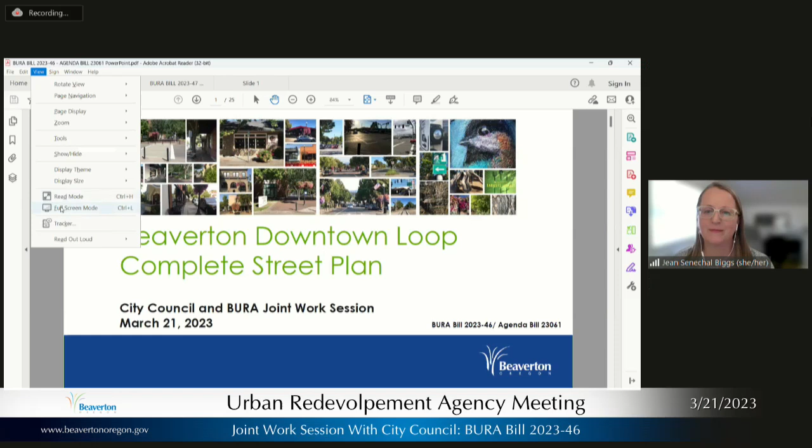Terrific, okay thank you. So the Downtown Loop Complete Street Plan - this project is a partnership between the city and BURA. BURA funded the planning phase and we're close to completing this work. The project team is in our final round of community engagement to gather comments on the project's preferred alternative, which is the conceptual design that the team developed based on stakeholder input from early 2022. With the concept plan for the proposed changes in place, it sets the stage for our next steps.

So what is the loop? The loop is a bold and transformative vision to link Old Town and Beaverton Central with transportation investments on Hall Boulevard, Watson Avenue, and 5th Street that support a vibrant and inclusive downtown. We're reimagining our streets and sidewalks to create an exciting pedestrian experience, something we heard consistently from BURA board members and the council when we've spoken to you in the past.

So as I go through the presentation, please keep these questions in mind to guide your discussion tonight, and I'll share these again at the end of the presentation.

Great, so we're on a path to adopting the Loop Plan. March and April are busy with engagement activities to inform the community and gather feedback. We're here tonight with this joint work session. We'll come back to BURA next month on April 25th for a brief presentation with our draft report and to share updates on our community outreach. Then in May, Council will consider adopting the plan through council action. As I said earlier, completing this planning phase with a high-level concept for the proposed changes sets the stage for our next steps.

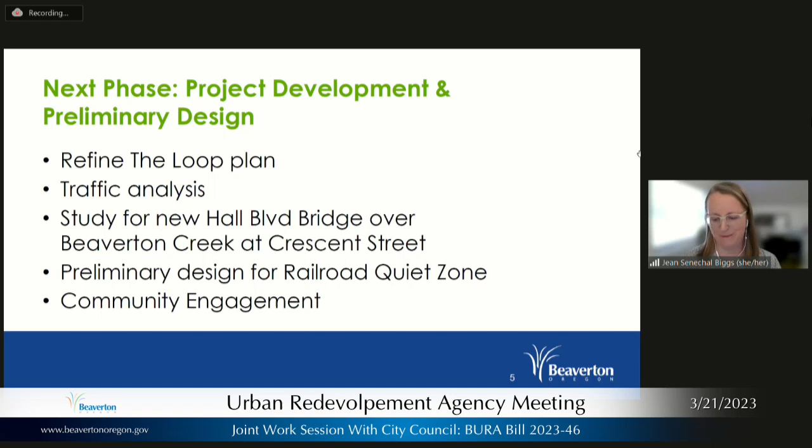And there's still lots of decisions to come in the next phase to refine the plan. We'll come back to you as those details are worked out. So let's start here.

The preferred alternative is based on our guiding principle of designing streets for people. It's about putting pedestrians first with sidewalks that are spacious and gracious, safe and universally accessible. It's about separating people biking from motor vehicles with continuous protected bike lanes. It's about improving the experience for people riding transit with better bus stops. It's about creating placemaking opportunities. And for people who come downtown by car for shopping, dining, and services, the loop creates a great experience outdoors and on foot to support what we call the park once and walk model.

In winter 2022, just over a year ago, we reached out to the community and BURA with design alternatives and asked for feedback. Hundreds of community members, visitors, and stakeholders have weighed in on the design options presented for the Beaverton Downtown Loop. Some, like the 22 people on our Community Advisory Committee, dedicated significant time to study the conditions, learn about technical constraints, and weigh the balance of needs for the diversity of people requiring access to downtown sidewalks and transportation. Others heard short presentations of the options and engaged in brief conversations with project staff. Through an online survey tool, 321 individuals advocated for their interests and provided insights on how the design options may be received in the community at large.

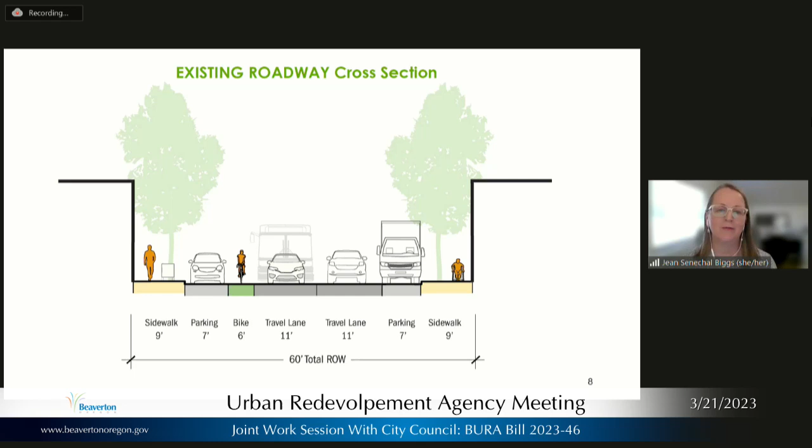To make space for wider sidewalks and protected bike lanes, the preferred alternative includes several key changes to the streetscape, including removing on-street parking on one side or both sides, planting new street trees and replacing our canopy as we create new wider accessible sidewalk spaces, consolidating driveways to reduce conflicts between people biking, walking, and driving cars, adding traffic signals to provide better clarity between travel modes, slowing traffic to reach our target speeds of 20 miles an hour, and in some places, acquiring property for additional right-of-way. Sometimes it's slivers at the back of the sidewalk, sometimes it's 3 feet along an entire frontage so we have space to build those wider sidewalks.

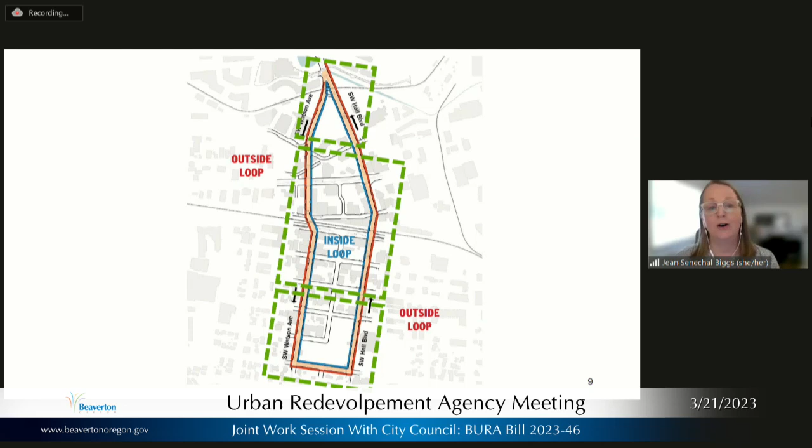So the preferred alternative is defined by these 3 segments that you see highlighted in the green boxes, and all 3 create great pedestrian experiences throughout the loop. Let's walk through them. Let's go to the next slide.

This middle section we call the promenade extends from Millikan Way to 2nd Street. Next slide.

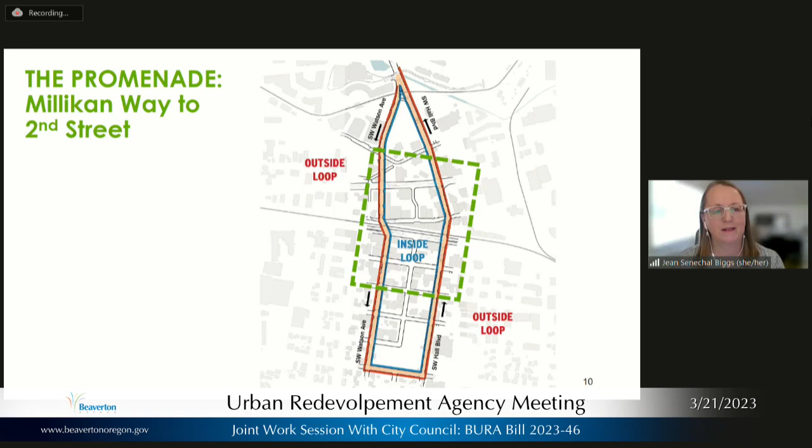Here you'll see 12-foot sidewalks on one side of the street and 18-foot wide sidewalks on the other, an 8-foot wide raised bike lane—we call it cycle track—and then 2 11-foot travel lanes. Next slide.

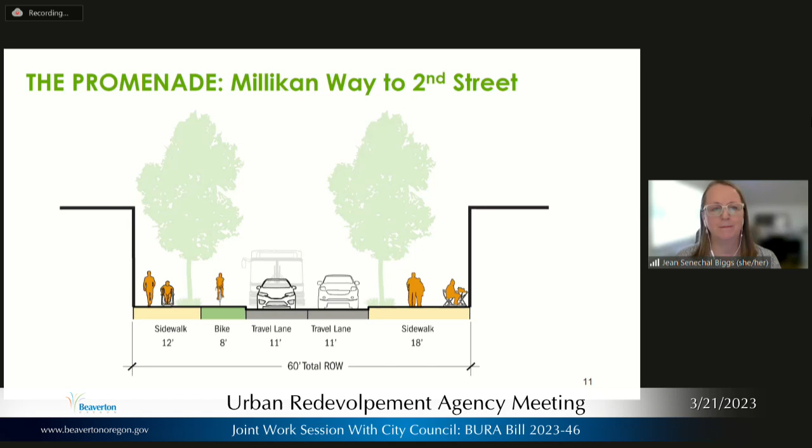So what does that look like at the street level and how would we use that space? With these 18-foot wide sidewalks, you can see we can create lively places to gather, meet friends, enjoy downtown. We can support business activity with space for A-board signs, store displays, and cafe tables, and we can ensure an accessible route by maintaining a clear pedestrian through zone. Next slide.

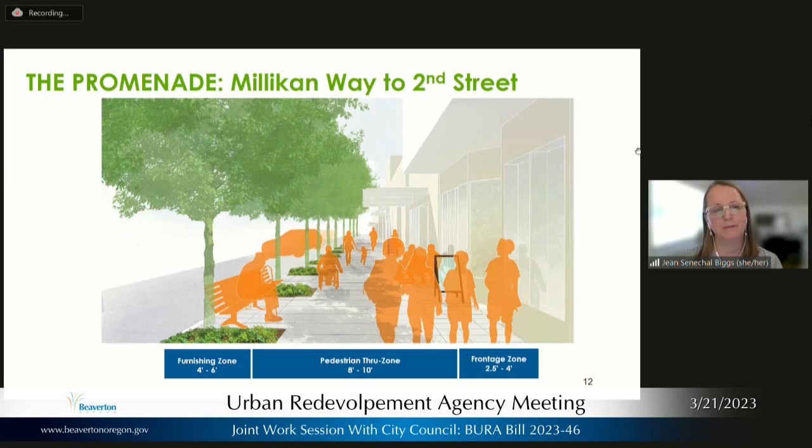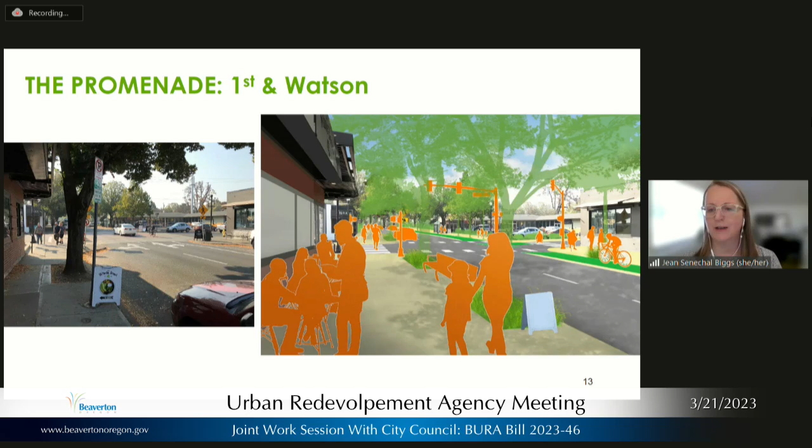One of the things we heard from our CAC, our Community Advisory Committee, is that there is no loop without addressing the crossings at Canyon and at Farmington. So how do we make crossing our 2 major urban streets a more comfortable and safer experience?

We do this, as you'll see in the picture on the right, by installing high visibility crosswalks with ladder bar markings and green cross bike markings through the intersection, which make people walking and biking more visible. We improve safety by timing the traffic signals with leading pedestrian intervals—this is when the walk sign goes on before the green light for cars, so pedestrians have a head start crossing the street and are more visible to people driving through the intersection. We also improve safety by removing the third travel lane approaching those intersections, so there's only one lane of vehicles turning left or right into the crosswalks in these locations, but it also creates space for the bike lane that just doesn't exist today.

Okay, let's go to the next slide.

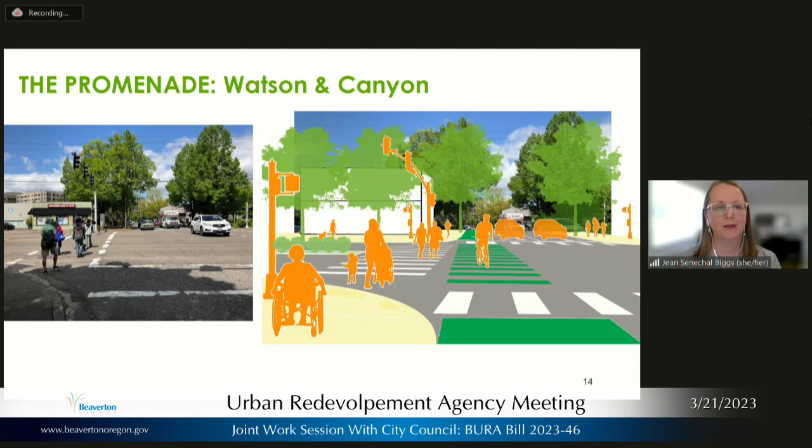So here at Hall and Canyon, the plan proposes using pavement markings that highlight the space for people walking and biking, giving priority to pedestrians with a head start when they cross, and removing that third travel lane to create space for bikes that doesn't exist today. Also, removing the right turn slip lane on the southeast corner of the intersection, so that cars turning from Hall onto Canyon have to make that turn much slower than they do today.

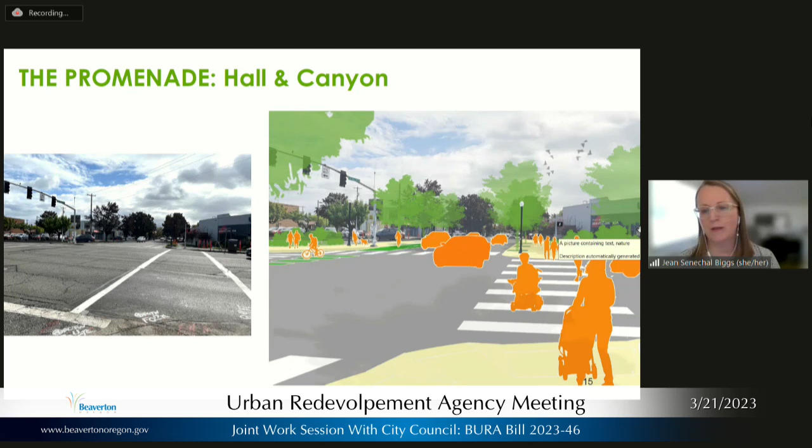Next slide. So we're going to move to the Old Town portion. Let's go to the next slide.

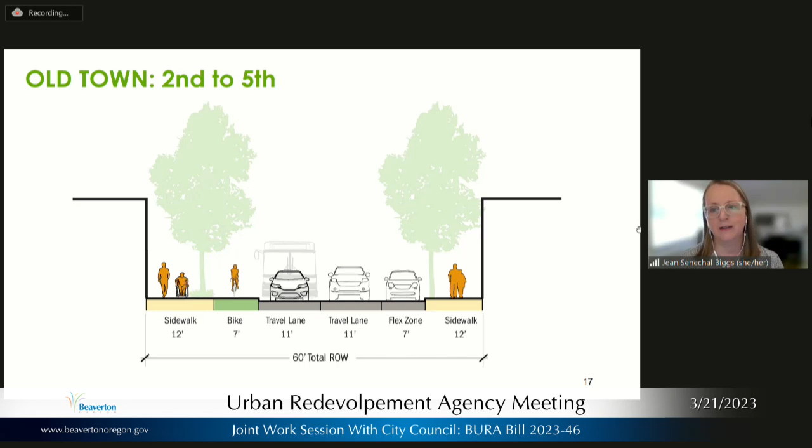So here's our cross section. Different here from the promenade is that you'll see the parking return on one side of the street. We have 12-foot sidewalks on both sides, a 7-foot cycle track, two 11-foot travel lanes, and a 7-foot flex zone. I'll explain what that means in a minute.

Next slide. So now here's an image of the 12-foot sidewalk adjacent to the 7-foot cycle track. You'll see here how the sidewalk space for people walking is separated from the cycle track by the furnishing zone with its street trees and other site furnishings. Visual and tactile cues help separate the space between these modes.

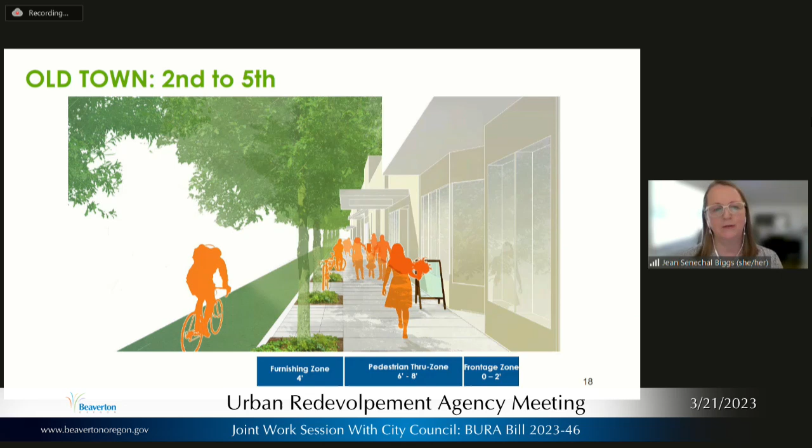Next slide. And then here's an image of the 12-foot sidewalk adjacent to the flex use zone. So here you can see a parked car, but you can also see outdoor dining in that same space.

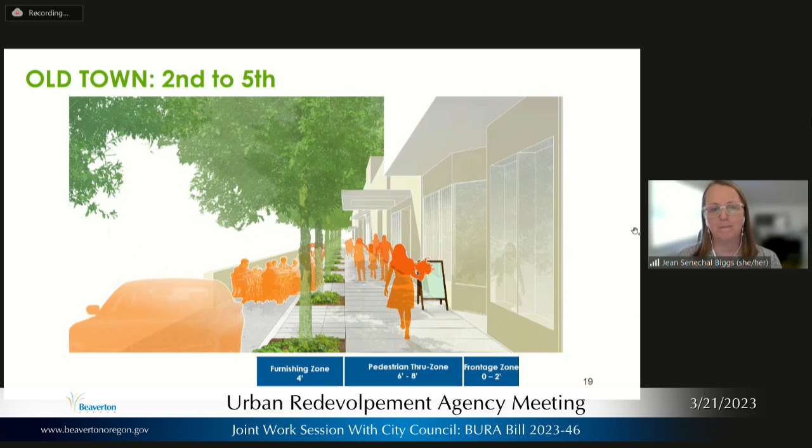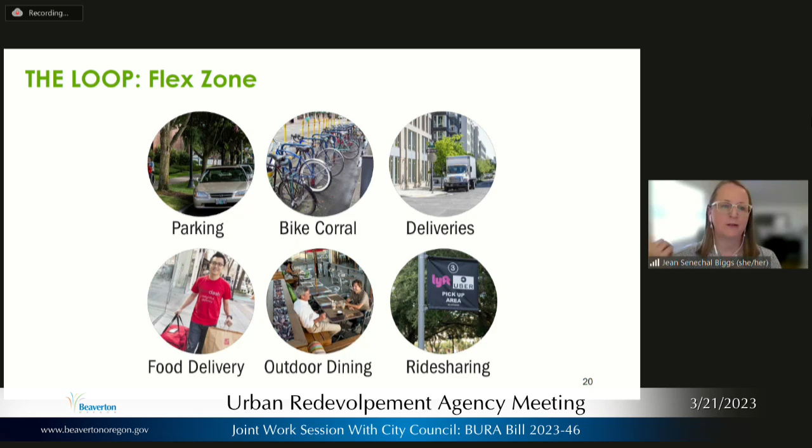Okay, so what about that flex zone? As we move forward with the loop, we can have more conversations about how we manage that space at the curb for a number of uses to serve our residents and the business community. It doesn't just have to be parking for cars. It can be used for on-street bike parking, truck loading, outdoor dining, and even very short-term spaces for ride sharing and food delivery. The thing to keep in mind too is that the loop also leverages the hundreds of on-street parking spots in the blocks around the loop to support business activity and those who drive downtown.

As we move into the next stage of the project, we'll work with the city arborist to identify several species of trees that work well in a Main Street environment and that are resilient and adaptable to climate change. But I also want to note that there are some trees that will stay. These are the trees alongside City Park and the City Library and the library lot, where we propose minimal alterations to those sidewalks. These ones were built more recently and they serve the adjacent use as well.

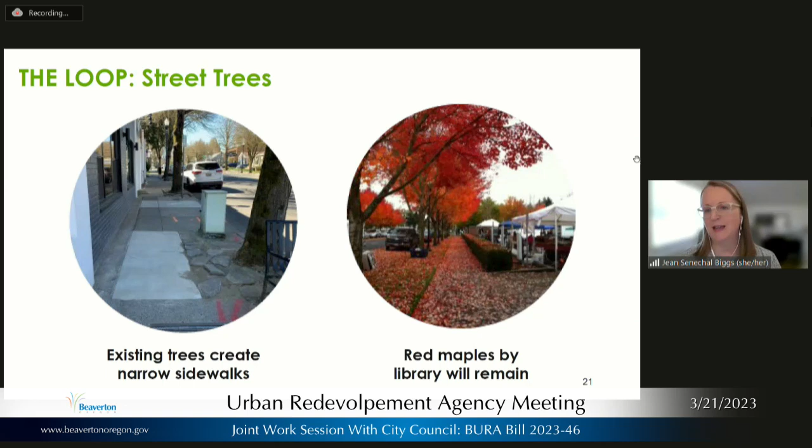Next slide. Okay, we're here in the last stretch in Beaverton Central. I'll just keep this brief. Next slide. So here's our cross section.

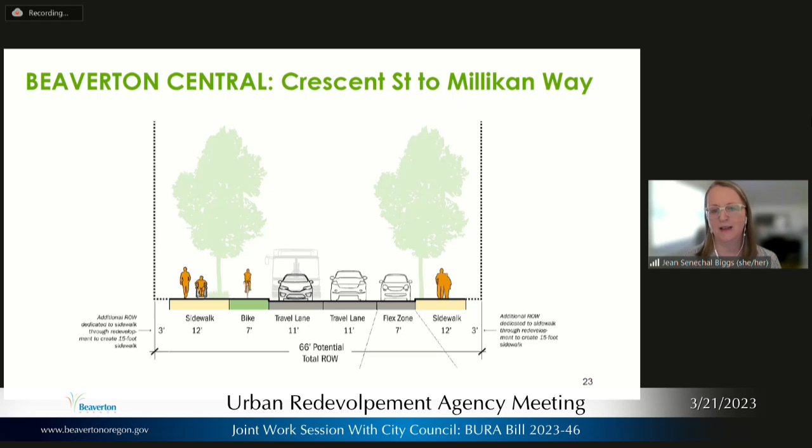We have 12-foot sidewalks on both sides, a 7-foot protected bike facility, a cycle track again, two 11-foot travel lanes, and a 7-foot flex zone. And it's in this section that you can see the potential for creating 15-foot wide sidewalks by securing an additional 3 feet of right-of-way through redevelopment. This concept of dedicating right-of-way can apply to any frontage along the loop with 12-foot sidewalks, but in Beaverton Central, where we have parking lots fronting Hall and Watson and not existing buildings, there's obvious potential. Next slide.

Okay, so that was a lot in a little time, and thank you for listening, and I welcome your thoughts and questions.

Council President. Thank you, Jean. I feel lucky that I got to see this last night because it gave me time to think about questions.

I guess I'm curious. I really love the zones and the mix of different styles of design to adapt to the amount of right-of-way we have. I'm especially excited about the reduction of lanes from 3 to 2 because those intersections just feel so intense, and they don't indicate that you're going into that high pedestrian area.

So I'm super excited about those changes. I also really loved seeing both the pedestrian ladder crosswalk and the green bike lane. It feels like you are entering into a different area. I love all the visual cues because we know not everyone reads things. We've talked about how those roads often feel like a little speedway.

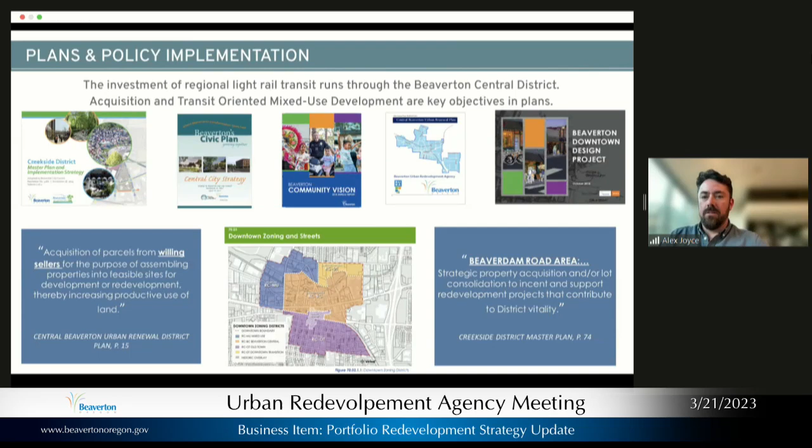So with that, it's sort of a reminder of the history. It was really actually fun for me personally to revisit some of these planning documents that have shaped downtown Beaverton, and really amazing to see the progress that you and your staff have made in reshaping the identity and the vibrancy of downtown. All of these ideas have been pulled into our thinking and our collective process.

One thing I want to call out is that there's the recently adopted downtown equity strategy that we're leaning on in terms of the outreach and the aspirations and the goals. This development strategy will center equity as part of it. In addition, we re-engaged with about 20 BIPOC members of the community, business owners, entrepreneurs, homeowners, residents, to take a fresh look at some of our ideas as well and solicit input for the process.

So we're standing on a body of work, but our project purpose is really about creating a high-level plan, strategy that's actionable, but also flexible. This moment in time is a challenging one from a development perspective. Interest rates are at an all-time high. Construction costs are at historic highs. So there's no shortage of macro-level challenges facing the development world, but this plan will be flexible as market conditions change. You can capitalize on opportunities and be prepared to capitalize on those opportunities.

The strategy is really about creating a unique strategy for each site, a holistic vision for all of the sites in downtown, but a unique strategy for each of the sites that is tailored to each site's unique strengths, weaknesses, and opportunities. It lays out an approach to the way that you utilize your land that accounts for both the market realities and the need to generate tax increment revenue, but also balances those realities against your aspirations and goals related to affordability, equity, and sustainability.

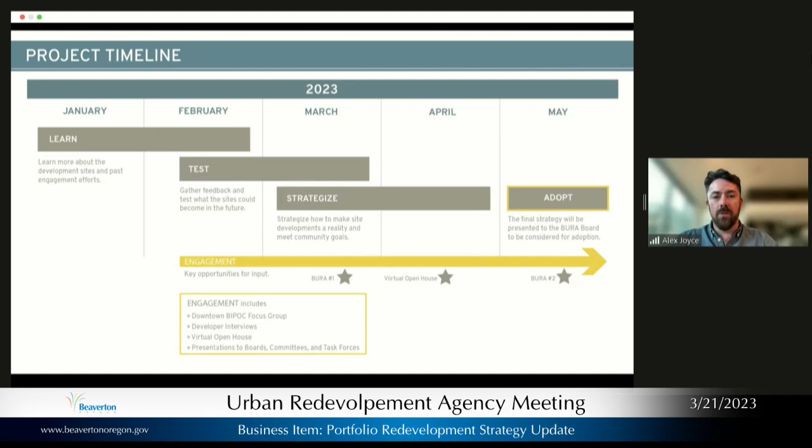As part of our engagement efforts, we've had this downtown BIPOC focus group, which I mentioned. We conducted a series of 8 developer interviews representing nonprofit developers, for-profit developers of all sizes. In April, we're going to be conducting a virtual open house to solicit a wider array of input on some of these key ideas. And staff will be leading a series of presentations to various boards, committees, and task forces over the next 4 weeks. So it's a rapid process, but a process that has a lot of engagement as well.

So just a quick reminder, the 5 sites in your portfolio that we're evaluating are 2 clustered right around the BG food cart pod, sites 1 and 2, BC2 site, Beaverdam West. The Lombard West site located near the MAX station, the Buffet site on the north end, and the Broadway East lot on the south end.

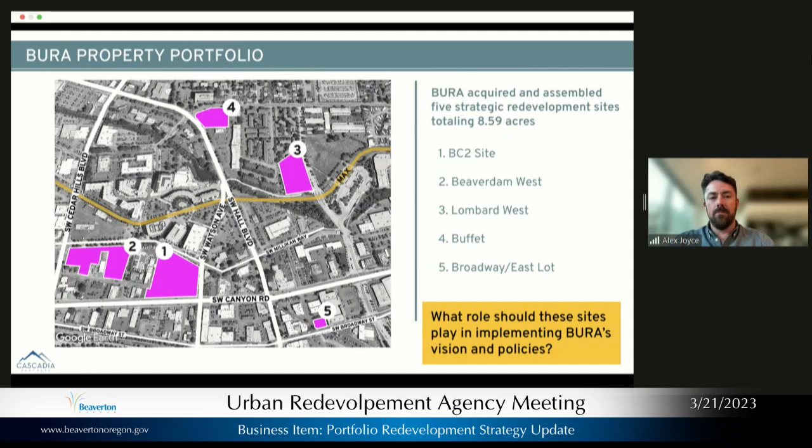And really the question is, how can each of these sites and their unique strengths and weaknesses help you implement your vision, broader vision for downtown and the BURA area, and your policy objectives? And they all have their unique strengths and weaknesses.

The key questions that we're keeping front and center as we go through this process are really defined by: what uses should be prioritized? What uses are missing from downtown currently, what uses would catalyze additional development in downtown if they could just be proven in the market, what uses are in desperate need, like affordable housing and affordable commercial space. And once we understand the priority set of uses, which of these uses will require public and BURA's additional attention or investment to make happen.

Not all uses can happen in the marketplace today, and so we have to prioritize, and there's not an endless amount of money, so there has to be a prioritization of where BURA can make the biggest impact in terms of those uses. Where are the most strategic sites?

Location, location, location is the adage in real estate, and it applies to a development strategy as well. So certain of these sites are in locations that have more strategic advantages in the near term. We want to identify that and sequence your strategy to take advantage of the strengths of their location, but also your internal capacity to work through each of them.

What are the first moves? What are the moves that are going to have the biggest impacts on each of these sites? And then what are longer term moves that can help position some of these sites that are not immediate movers to be successful?

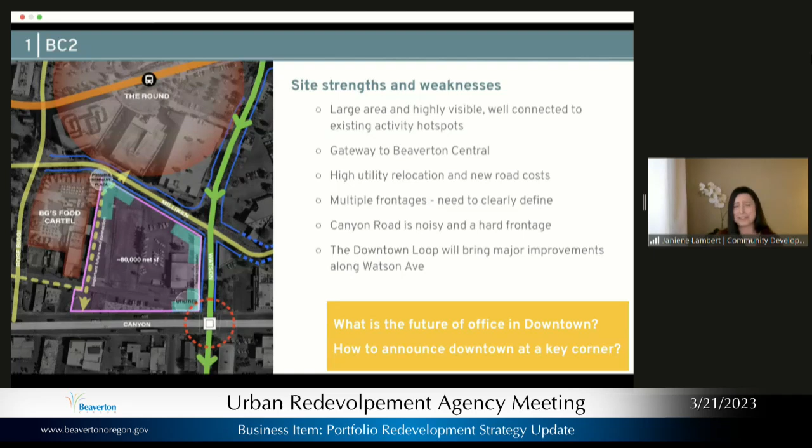So Alex, we're going to have to go pretty quickly through these next slides. Okay, we have a hard stop before 7 and we still need Q&A. Thanks so much, sorry the other item went long. No problem.

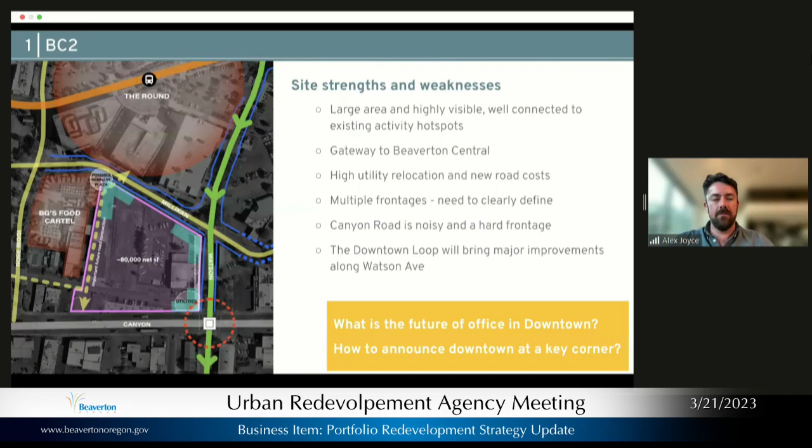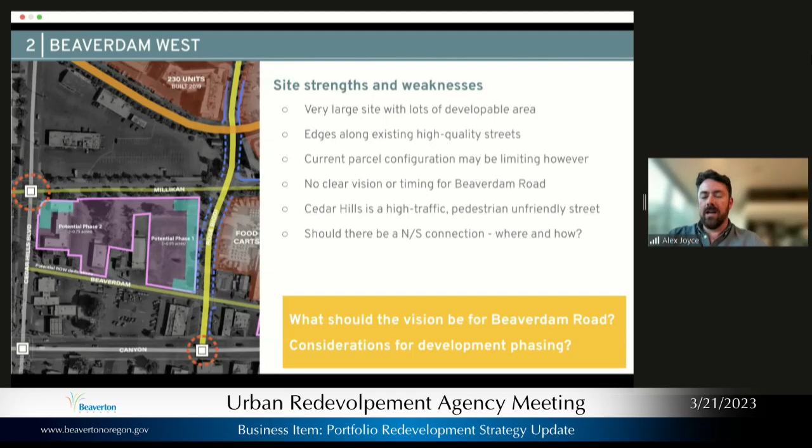So this is one of your flagship sites. It presents an opportunity for a downtown gateway. It's large enough to think about multiple uses, including potentially an office type use. Beaverdam West looks sort of an odd shape, but there are plenty of development opportunities given its scale. The fate of Beaverdam Road, what is that fate? How can it define what happens on the site?

Lombard West is adjacent to the transit center. How do you define transit-oriented development, and can you push the envelope on what that means?

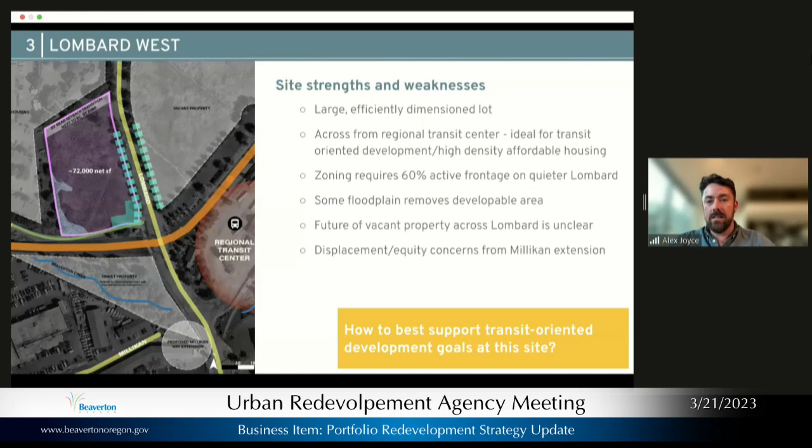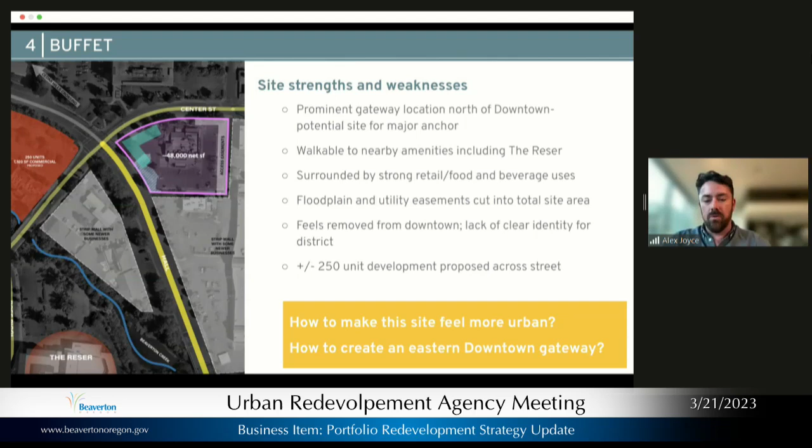The Buffet site is an opportunity to bring an urban character to this rather suburban location potentially, and define an important corner, an intersection and gateway into downtown.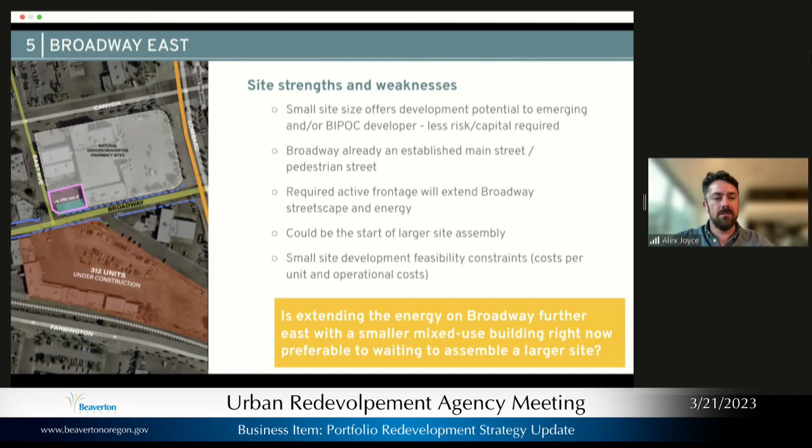Broadway East is about the size of its small fabric sites to the west, and there's a lot of energy on Broadway. So is there an opportunity to just extend some of that energy further east?

So I'll pause there and just ask if the program, the path we're on right now, addresses the fundamental topics of interest to the board, and if some of these questions resonate with you.

Quick question for Tyler or Bill. We have an item that we have to take a vote on, and we have 4 minutes. Do we need to do that? Yeah, it should be a real quick one, Sarah, so we can capture that, and we'll probably not do the executive director report tonight. Okay, so are we opening this up for questions? I think we have about 2 minutes worth of questions, and we can also try to get a sense of what those questions are and maybe respond to them offline in a different format.

Okay, so the most impassioned folks in the room with the most burning questions, you have 35 seconds each. Nadia, I don't have an impassioned question. I mean, I have a lot I want to say on this topic, and so I worry that we're rushing, but I'll stop, there's so much to dig into here.